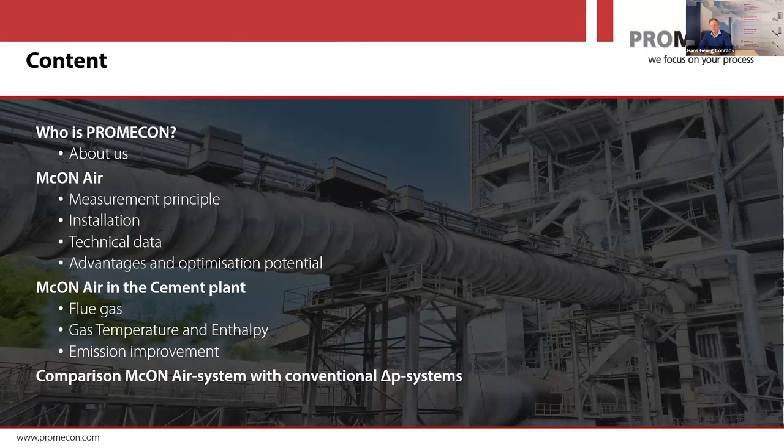And then I'm going to give you some examples of the cement plant process where we have optimized. And these have been very often optimized with process engineers, hands-on. But it's needless to say that you can use our data in any model and in any more complex control algorithm to optimize the plant. So I think it's really a yin-yang, controls and measurement. So as I mentioned, we have been around for quite some time, and we have left quite a footprint also in these industries, including the cement industry. What we do is measure gas flows, but what comes with it is also the analysis of the process itself. And I'm going to give you some examples of that throughout this presentation.

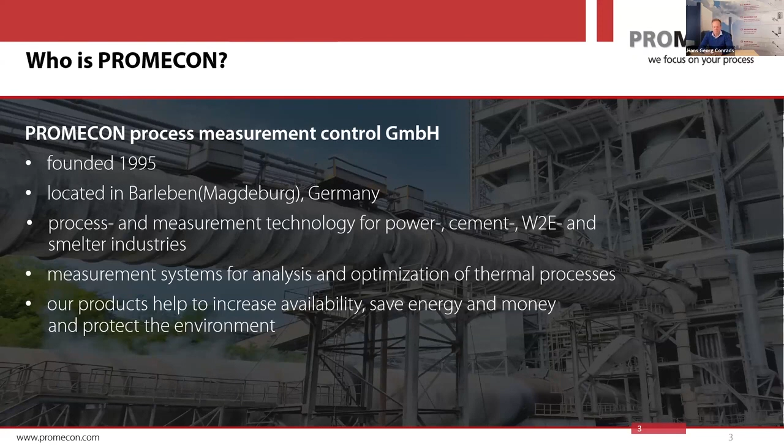The core thing that I want to talk about today is how to measure a gas flow of dusty gas. And this may seem a bit boring because gas flow measurement has been around forever. There have been delta pressure measurements or Venturis or other devices. We've seen thermal anemometers. We have seen ultrasonic, so all sorts of devices. But the main issue here is that measuring a gas flow that might be 1,000 degrees Celsius hot, that might be dusty, that might be very aggressive, is something that is very difficult. And especially in cement plants, like in other processes, power and steel, the most important thing is that the measurement is repeatable and it gives you the same answer over a long time.

If you have signals that are starting to jump back and forth, you are getting process noise, and even with artificial intelligence and neural networks, it's very hard to model that. We've been part of a lot of optimization projects, and the most vital thing that makes artificial intelligence helpful is the same thing as with the operator. If I have repeatability, then I can make of the data a very good process optimization. I have a very nice convergence of my data to find the optimum set point.

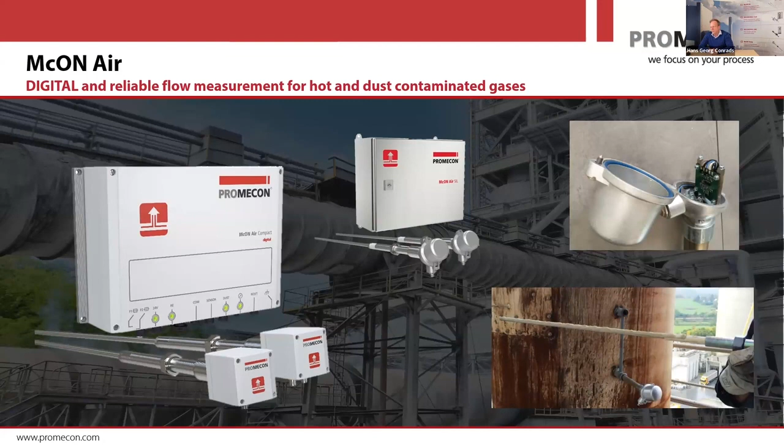Well, the first thing you can already see, our measurement always consists of two sensors. So we have an upstream and a downstream sensor. And what we are actually doing is fairly simple. We have two sensors that are sensing the electrostatic signal coming from the clinker dust or the raw meal or whatever particles go through the pipe. And what we can sense here is that when the particles pass by the antenna, they leave a typical time signature, which is basically the change in electric field in the vicinity of our sensor.

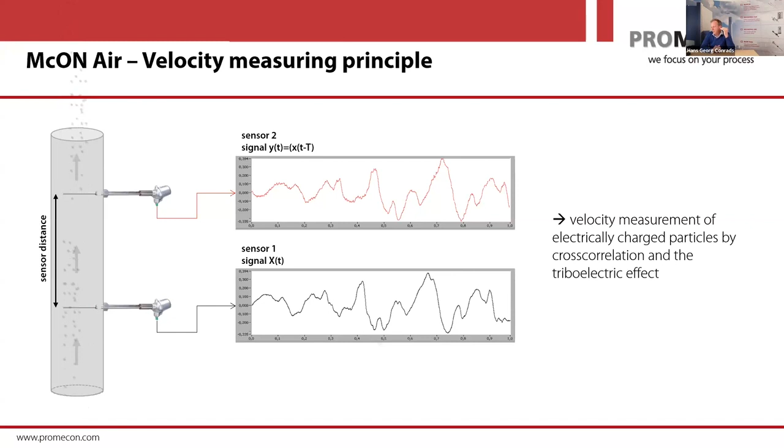If you do that on an upstream and a downstream sensor that are spaced very closely, like 350 millimeters, you can see that this pattern is very similar. You can see with your own eyes, the upstream and the downstream patterns look pretty much the same. And this is because the flow dynamics from one sensor to the other do not change instantaneously. It takes some time for them to change. So if you are within a certain short distance, this information is more or less kept the same. The only thing is it's time shifted because you're not at the same location. And this way it becomes digital.

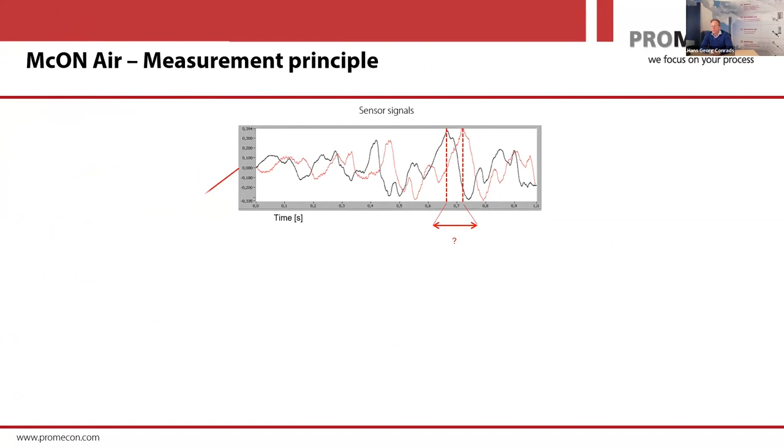What you do is you digitize these two signals, and you don't care about their magnitude. You don't care about their amplitude. The only thing that you care about is their statistical match. So you digitize them, you put them into a cross-correlation filter, and out you get the cross-correlation function. The cross-correlation function is basically showing you a maximum at the time shift where the two curves have the best statistical match. So you basically shift them on top of each other and you move them. And wherever they match best, you have this maximum in your cross-correlation function.

Now, why is this so important? It is so important because the only thing that matters in your measurement is the similarity of the two raw signals, which you then calculate statistically. And that means that the only parameter that you are depending on is time. That's it. So it's a pure time measurement. So if you have a time clock on your processor card, you have a repeatability of 10 to minus 6 or 10 to minus 7. And that's your repeatability. You will not find any measurement that starts to drift over time.

And that means that in some central areas of your cement making process, you can establish a certain reference that will not move. There are many other things that move around. And as both of the speakers ahead of me mentioned, the degree of complexity in these processes can be quite large. And when these processes drift over a long time, it's going to be very hard to follow if all the parameters start to drift and all the sensors start to drift. You will start modeling the inaccuracy of the sensor. Now, with a digital sensor, you will have the same response all the time, and that gives you a huge advantage in converging to the best process quality.

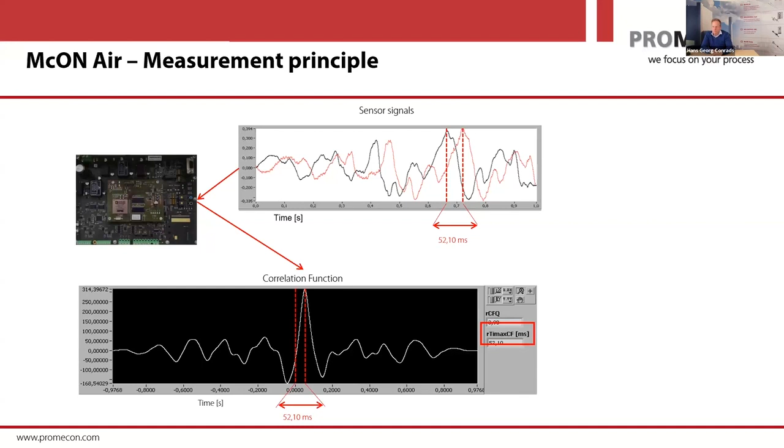So in this case here, 52 milliseconds is the time shift. And with the distance of the sensors and the time shift, you can calculate the gas velocity. And using the temperature, you can then calculate the gas flow, including the gas enthalpy flow. So this is how the box looks. You have two sensors, you have our electronics, and out comes a 4 to 20 milliamp signal, or a digital signal if that's preferred, that gives you the gas flow. What I mentioned also is that we can measure the temperature of the gas at the same time. So it's easy to measure the gas enthalpy flow and also the thermal energy flow of the gas.

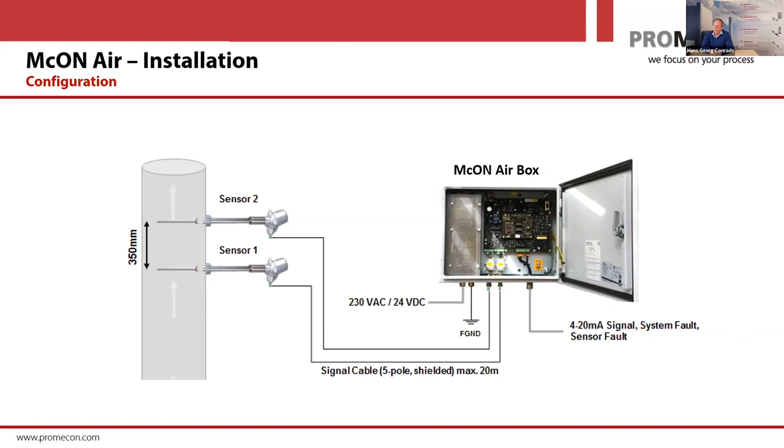So basically what we have here is a flow measurement that can measure up to temperatures of 1000 degrees Celsius, that can measure in a velocity range of 3 to 100 meters per second, completely linear. We have a huge turndown ratio because we do not have any squared relationships that you might have with delta P systems. With a very high accuracy over the full span, and needless to say, an outstanding repeatability.

And that's really what has been our recipe in the cement industry, to have such a high repeatability of our signals and such a low maintenance requirement. A reaction time of smaller than 1 second. And of course, integrated thermocouple if necessary in order to accomplish the temperature measurement.

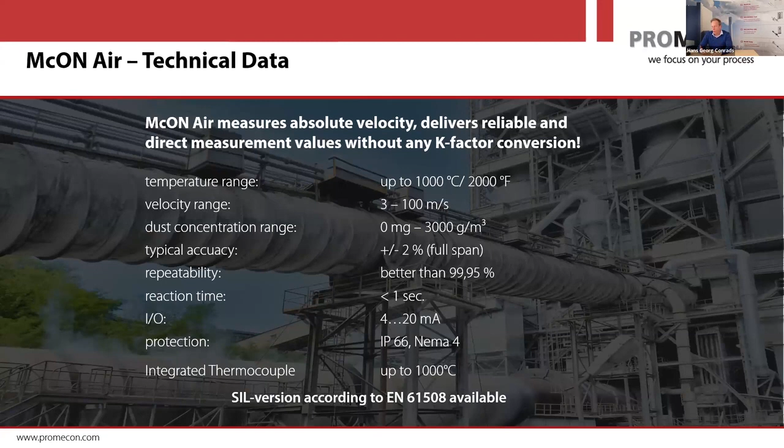We also have an SIL version of this, but this is not so interesting for cement. Many power stations use that because of the safety aspect of boiler safety. So also power stations are using our system to optimize their combustion.

So here's in a nutshell what is in essence the main advantage of the digital measurement. We have no K factors that have to be implemented, no calibration, no drift. There's also no big duct modification necessary. We do not shine through the duct, or we do not have to mount sensors on opposite sides of the duct. No regular cleaning or maintenance. And again, drift and calibration free because it's completely digital.

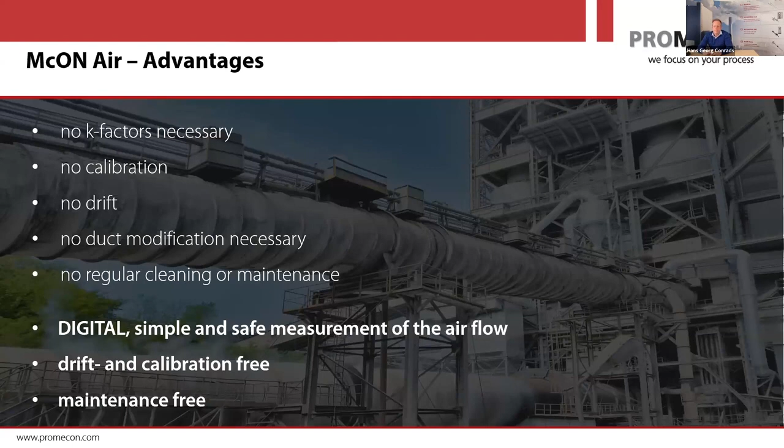Now, this opened up the complete world of being able to measure gas flows in locations where they could not be measured before. So imagine you have a vertical roller mill. You want to know how much gas comes out of my roller mill. That's different from how much gas do I get at another point. Can I measure right in the dirty gas flow? How much gas is going back to my roller mill or to my raw mill through the recirculation duct?

What is the main gas flow coming through the downcomer? How do I know how much gas I pull out of the downcomer? This is the classical optimization task for optimizing ID fans. How do you optimize your ID fan? You have O2 value, or you have some other indication that is not very up to date and is fluctuating around. What if you have, in addition, the real flow value that comes from your downcomer?

It's very, very easy to optimize an ID fan. Whether you do that with a classical controller or you integrate it into your overall AI model, it doesn't matter. You have a stable measurement point. Same applies for the bypass or for the tertiary air duct.

So let me spend a few minutes on what we have been optimizing as examples in cement plants. I must also agree with the two speakers ahead of me that cement making is very complex. And in many cement plants, there's a lot of attention on predictive maintenance, on repairing things. Optimizing process is very, very tricky, because if you start to optimize on one end, you have many other things that you influence, and you have to keep track of many, many variables.

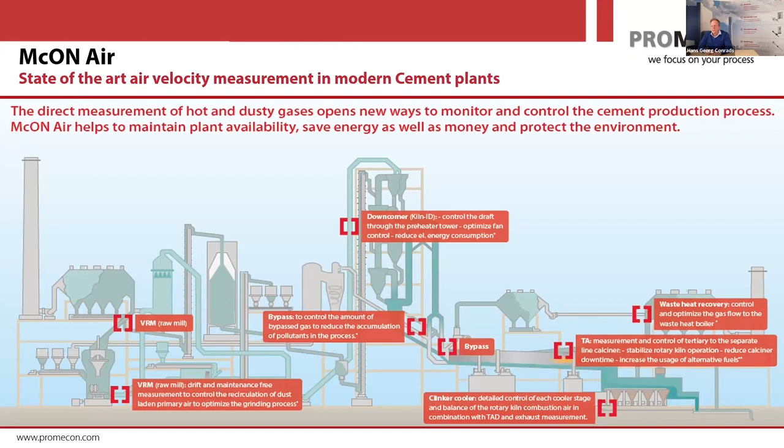So therefore, many cement plants really do not have the full potential of optimization that they should have. And the way to go there, I think, is smarter controls along with better measurement in the critical areas of the plant. So let's go through a couple of examples that we have. I will touch upon some of the highlights that we've been seeing throughout the years, what customers have asked for. One of the biggest ones is the raw mill.

Everybody knows the raw mill is a very large machine. It has a huge power consumption. Overdrafting the raw mill has consequences in power consumption, but also in grinding quality, in wear. So nobody wants to overdraft the raw mill. On the other hand, having a flow through the raw mill that's too low can trip the mill, which is something that is even less desirable.

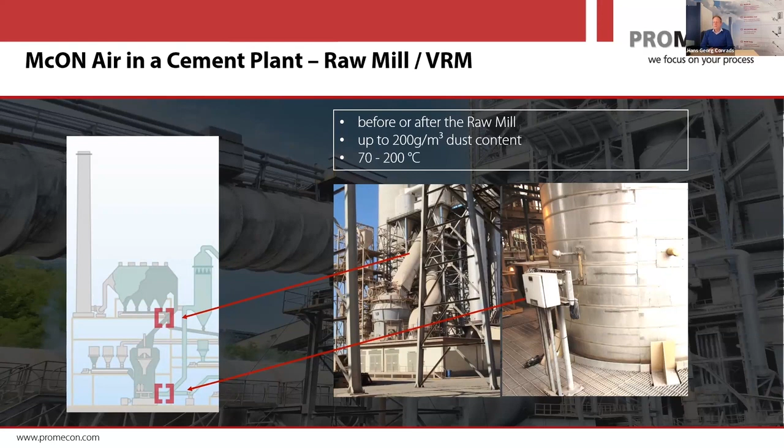So people would like to know, what is my gas flow through the mill? Do I have the right gas flow? Every mill manufacturer specifies a certain gas flow, but it's hard to maintain. So the ID fan has to be operated so that the airflow that the mill design gives you is achieved. Now, this also, of course, has to do with moisture that's in your gas, with additional components that might also be gaseous. So you really have to know the velocity of your gas flow independent from the fan operation.

Usually operators like to adjust the gas flow a little bit on the high end. And that is exactly because they want to be sure that the mill empties out, that you don't get a drowning mill. These mills have 200, 300 tons per hour. So if a mill like that trips, it's a monster problem. Now, this safety factor costs you a lot of electricity. Of course, everybody knows that. If you have an ID fan, even if it's frequency controlled, you have a ratio between flow and electric power of third order.

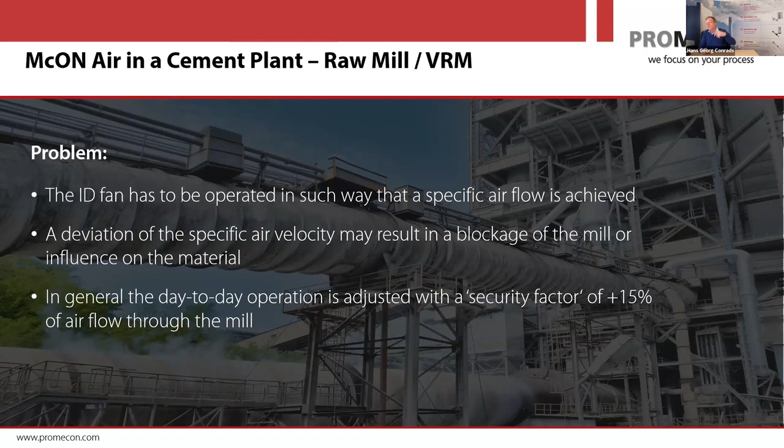So if you increase the flow just slightly, you need far more electric power. So it's a very big desire to reduce the flow to the lowest possible set point. And for that, you need to be sure of what the flow is, right? If you don't know that, you can try to model it, you can try to find intelligent solutions for it, but usually the shortest way is to have this parameter as a direct measurement that can go into your optimizing system.

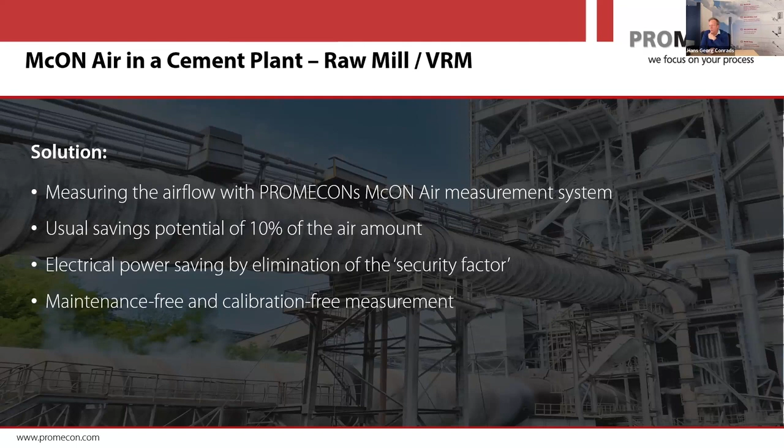So an example that we have, typically for a mill, is 1 kilowatt hour per ton of grinding material. Now, if you have, for example, a large mill, you could have continuous savings of about 150 kilowatt hours for a 150 tons per hour mill. Of course, when I say the ROI is reached after 1,500 hours, that includes the optimization of the flow.

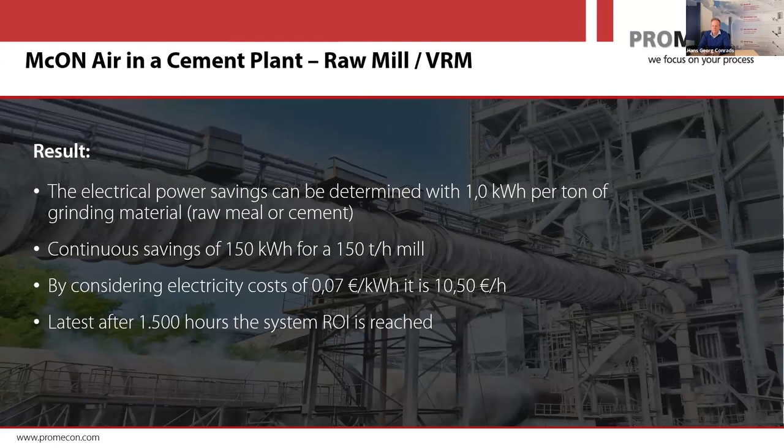In some plants, it's very simple. People don't have to use smart systems for that. But this is just one aspect. There's so many more aspects in the plant that you can optimize once you know this value, and once you can rely on this value, right? So that's one of the very typical ones that we get.

Another one that's very popular is the downcomer. Why is the downcomer so important? Of course, the downcomer carries all the gas that comes from the pyro string. So all the gas that comes out of the rotary kiln, all the gas that comes out of the pre-calciner, goes through the preheater tower and then finally comes to the downcomer. And it ends in an ID fan. So you have basically two places where you have ID fans on either side of the pyro process.

And if you would like to stabilize this process and be sure that the amount of gas pulled through the kiln and also pulled through the TAD is as flatlined with as little process noise as possible, the only way to do that is to measure it. And many clients are quite shocked when they see how much the fluctuation in downcomer gas flow is. Measuring it is the easiest way to have a good indication of how to stabilize downcomer flow.

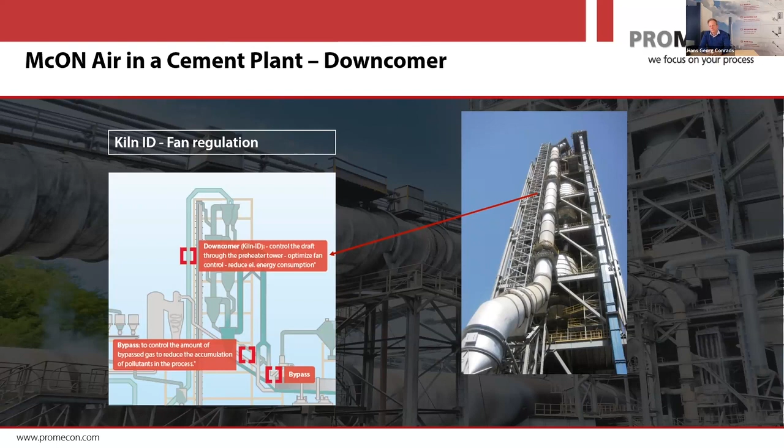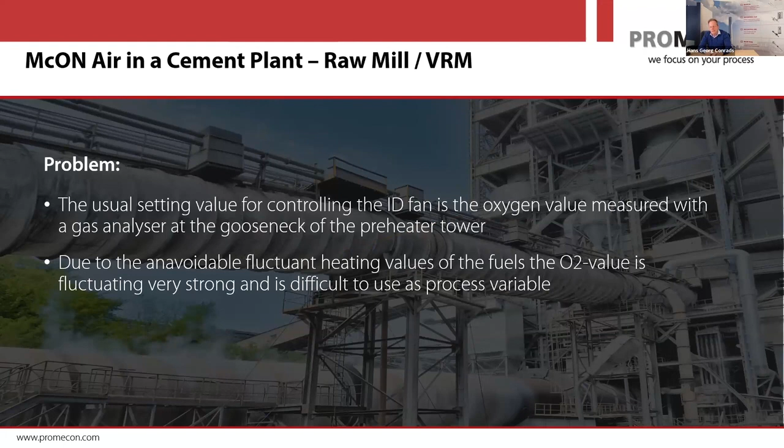Also here, it will stabilize O2 values in the kiln, as was already mentioned today. All these parameters interact with each other. So making the operation of these very big fans more flatlined and with less process noise will give you an immediate advantage in your controls. So again here, using the McON Air measurement for repeatable ID fan controls will bring you a big advantage in the stabilization of your process.

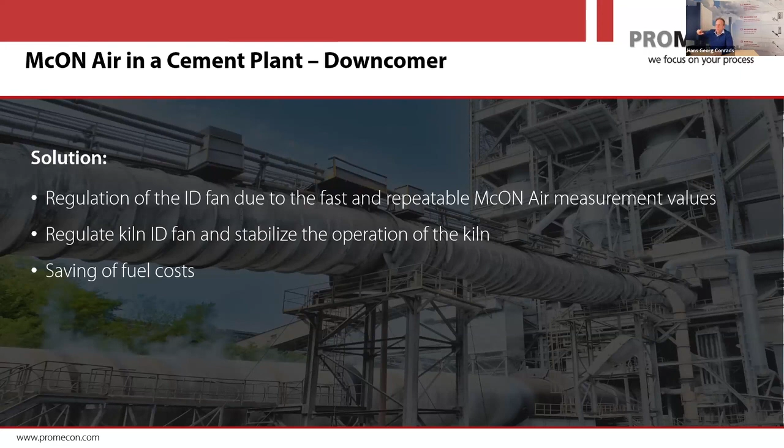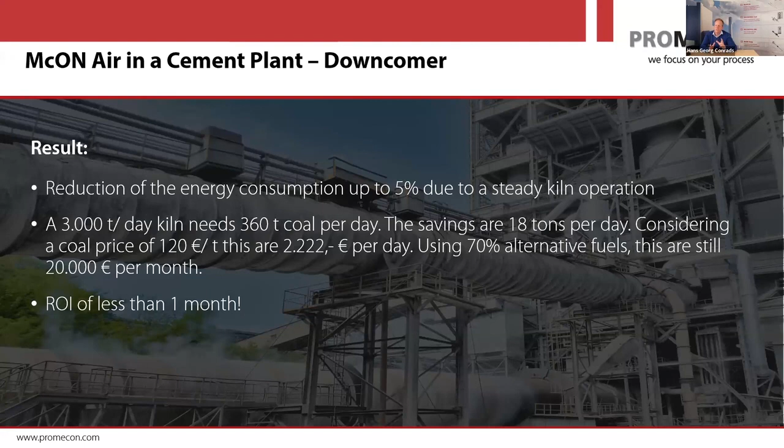And this has to do with everything. It's fuel, it's stability of the process. It even comes down to a stability of free lime. If you have these large energy intensive processes, if you can prove that you can optimize them, you will always make money in a short time. Measurement is a cheap investment. I've heard from the speakers before me, the optimization AI is a fairly cheap investment, besides all the big capex that a cement plant has. So it's really a low-hanging fruit to go for good instrumentation in conjunction with good controls.

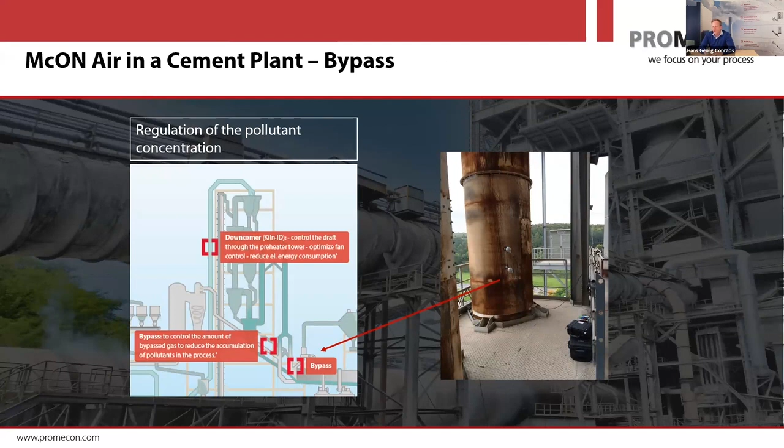I'll give more examples. It is important for many people to know bypass. They want to know how much bypass gas they have, especially in front of their pre-calciner. A very big thing that we have is TAD. I saw there's quite a few people from India in this presentation. I know that in India, NOx is a huge thing. If you have a pre-calciner, you blow in fuel. It can be petcoke, it can be coal, it can be fluff. And then you have the TAD, which gives you your combustion air.

So how do you know that the fuel to air ratio is correct? You have to measure the fuel, and you have to measure also the tertiary air. So tertiary air measurement has a direct impact on your emissions and on your NOx formation. So how do you measure tertiary air? Until Promecon came along, there was no effective tertiary air measurement. Today we have many, many references throughout the world in tertiary air measurement.

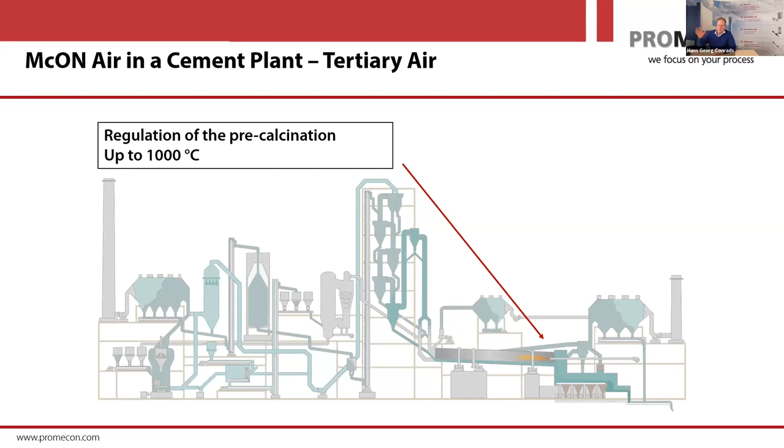Another thing would be waste heat recovery or the clinker cooler outlet. If you want to make a nice gas flow balance on the clinker cooler, you could use that directly to control the fans in and out of the clinker cooler in order to stabilize the neutral point in the clinker cooler and make your clinker cooling more effective.

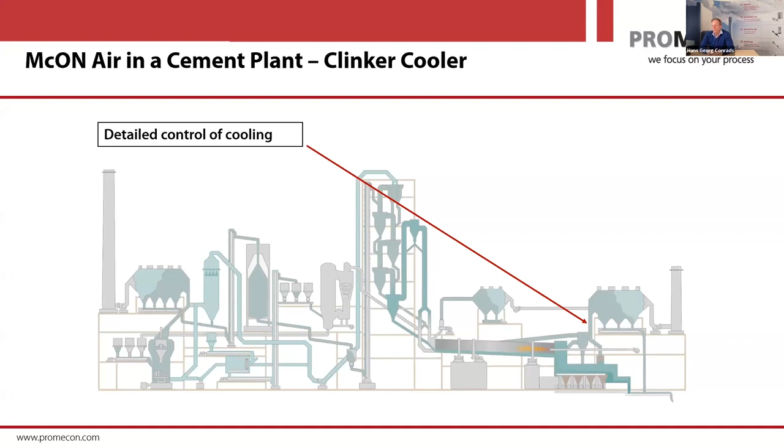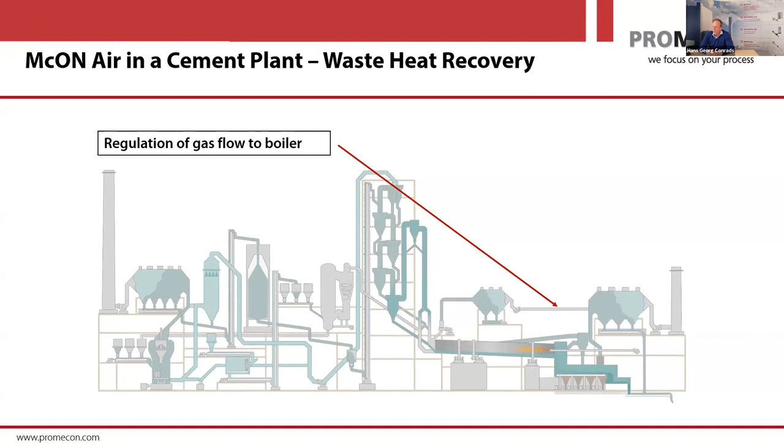So gas flow, I mean, if you just look at this picture, you can see that gas flow, besides all the, let's say, heavy metal stuff, is one of the most important parameters to measure. Last but not least here, gas flow to heat recovery boilers. There are a lot of heat recovery boilers around that become important. The total gas flow management in your plant is really depending on knowing what your gas flow is.

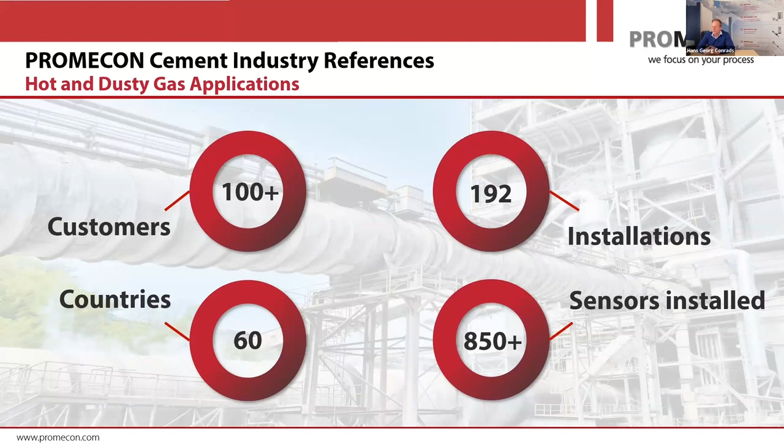So we have been introducing this solution into the market. We have more than 100 customers in the world. We have 192 installations. We have nearly 900 sensors now in 60 countries. So this is not a new solution. I must say we've had quite a few installations where clients have asked us, if we know this now, what can we do with it? I think the first speakers of today are a very good hint to what you can do with these signals in order to optimize your process. I think the perspective to have cement plants optimized have never been as good as they are today. There's lots of good technologies around.

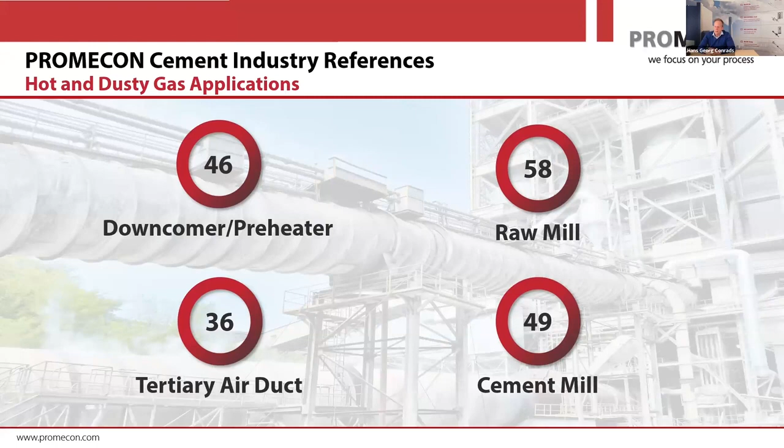And now, if you want to know what are the most popular applications, well, we did 46 downcomers, 58 raw mills, 36 TADs, 49 cement mills. This is compared to what you have as cement plants in the world, a small number. We're just starting in the world market, but still it's quite a big number. And this is where we have installed these systems. I guess there are little areas in the world where we have not been doing some work. Of course, Africa has been very interesting for us. I saw there's people from Dangote, but also, of course, Asia, Europe, US, South America. So we've been pretty much all around the world.

And with this, I would like to close my session today. Digital airflow measurement or gas flow measurement is, I think, one of the most important things to come along with good and smart controls to save energy and optimize product.

Thank you very much. Thank you very much, Hans. That's a great presentation, lots of good information, and a really nice fit with the first two presentations. Like you said, it's the old adage, rubbish in, rubbish out. So if you're wanting to make a good analysis, you need to have the right data, you need to have the quality data, and you've provided a really versatile solution there. So thank you very much for presenting that.

There's one or two questions. One is, how do you account for the turbulence in the duct and non-laminar flow? So just sort of asking about the working principle of your technology. Right. Turbulence is basically not a problem. In fact, it's a good thing. If you have a high velocity in the duct and you have a turbulent flow profile, it tends to be more flat. It's not a laminar flow profile where you have different flow velocities from in to out. But with the typical velocities that we see, about 15 to 30 or 40 meters per second, you just tend to have a flat profile.